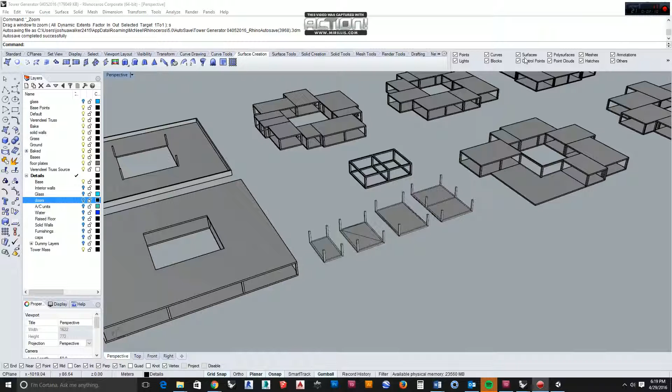The problem is, that's really hard to do with residential construction. Part of that has to do with what we see when we look at residential construction in China. You see the same floor plan extruded up who knows how many times, often upwards of a dozen, and you just get 12 exactly the same towers that provide the same option for all of the market and doesn't really address customization or meeting demand at all, except that what it does is it oversaturates the market, and then you have to charge less in order to fill every unit. So it's not a very efficient system, and it's not a very architecturally desirable system. So I set out to design a better one.

We start with a welded Vierendeel truss, or a rigid box frame, welded in the corners and factory manufactured. This becomes basically the chassis or the frame of an apartment.

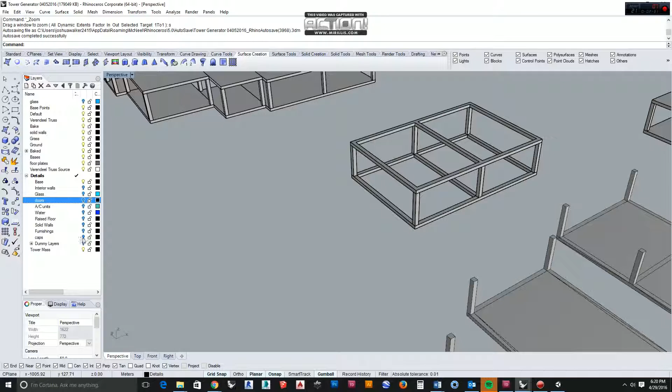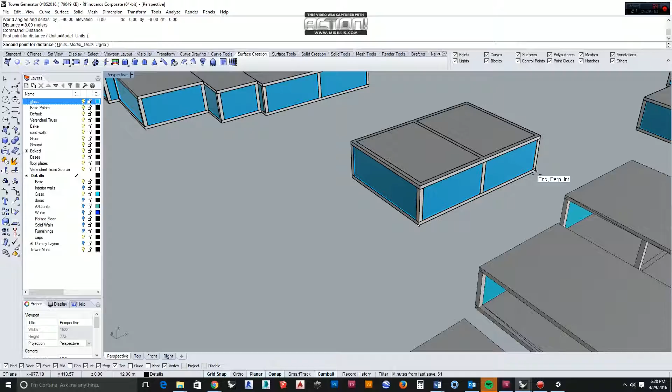The standard approach would be to put a cap and glass around it, and we can see that this would be a 3-bedroom unit, fully enclosed, with dimensions of 8 by 12 meters.

But of course we're going to have options besides that. We're going to have a studio, a 1-bedroom, a 2-bedroom, and a 3-bedroom so that we can meet everybody's demand needs. Rather than surrounding them all in glass, what we'll do is model the tower, and then put solid walls where we need solid, and glass where we need glass. That will look something like this.

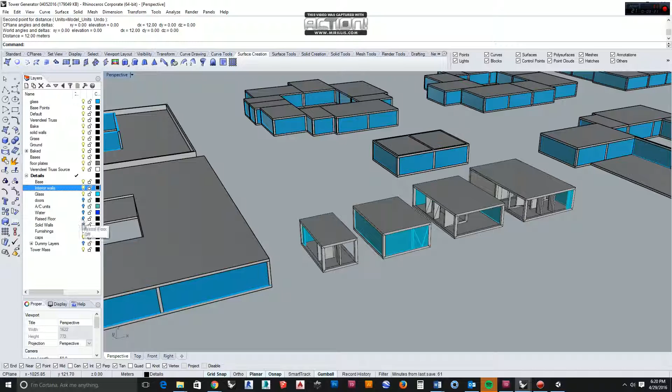So if I take the cap off, we're going to look down into the unit, and we can see interior walls separating the spaces.

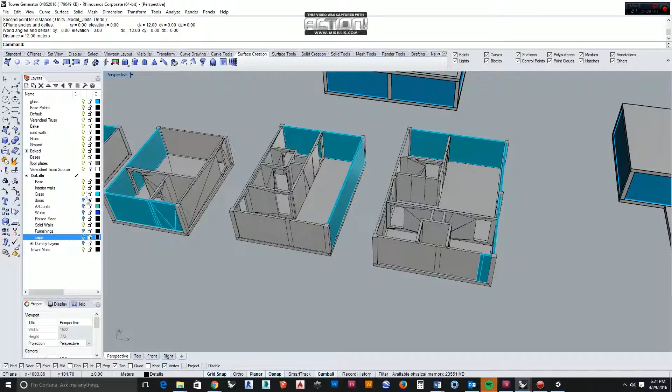Now the question when always dealing with modular units pre-manufactured is, how do you supply air conditioning, water, and electricity? Well, the first step would be to handle AC internally. Because every unit has access to the outside, we can put a split mini system in place and run the services underfloor. Similar approach for the water and electricity, running those underfloor and bringing them to the center core for supply.

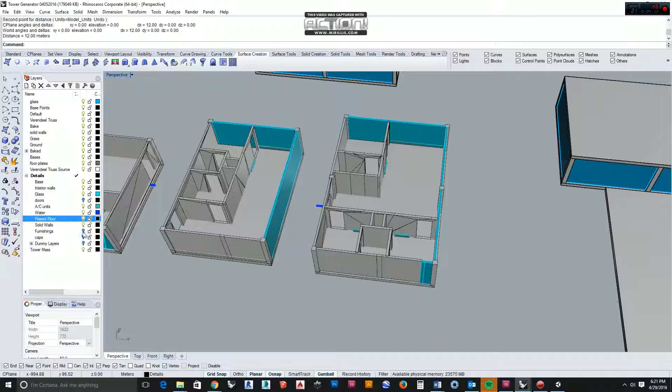So we put the raised floor in place, and you don't have to see the systems, and your units are taken care of. Finally, we'll put some furnishings in, get some pretty comfortable spaces in here. The 3 bedrooms do get 2 bathrooms, and the 2-bedroom gets a Jack and Jill arrangement.

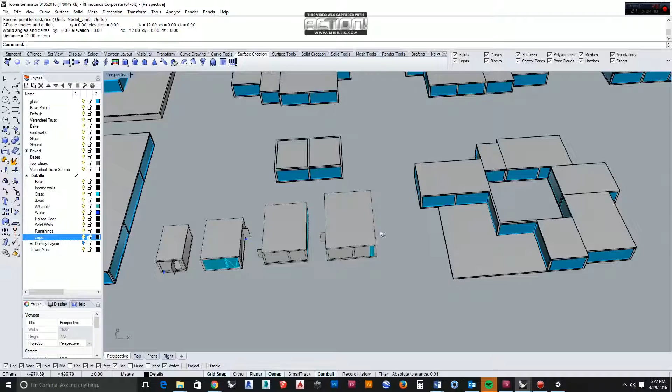Alright, so now that we have our units, what we do is we arrange them into floor plans. In this case we have all the units centered around a 12-meter steel core in various configurations. And then we have 2 non-residential options.

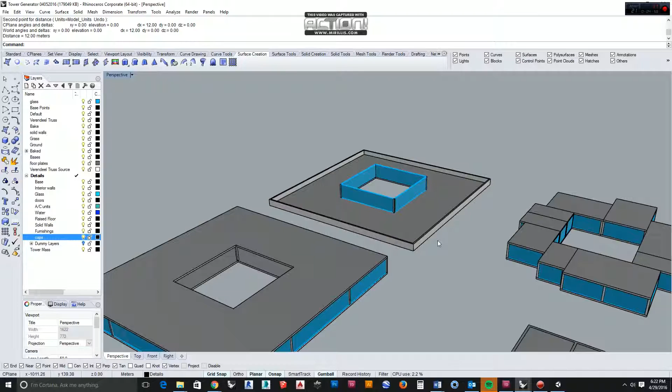We have what I call a smoking or social deck, where just the core is enclosed and the exterior becomes a public patio. Or we have an office or commercial floor where it's all enclosed and you can use this as a small business space or a CVS or something of that nature, maybe a laundromat, to serve the needs of the tower and grant this a true mixed-use status.

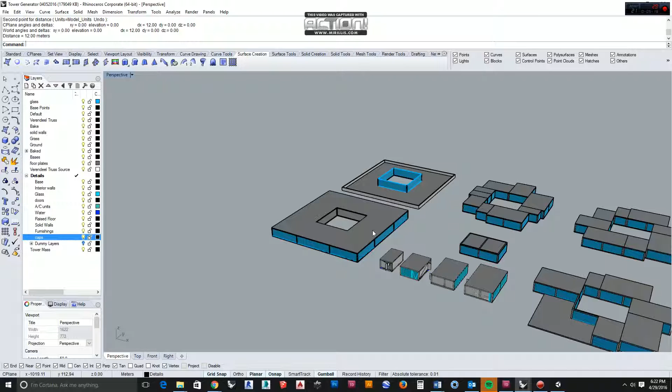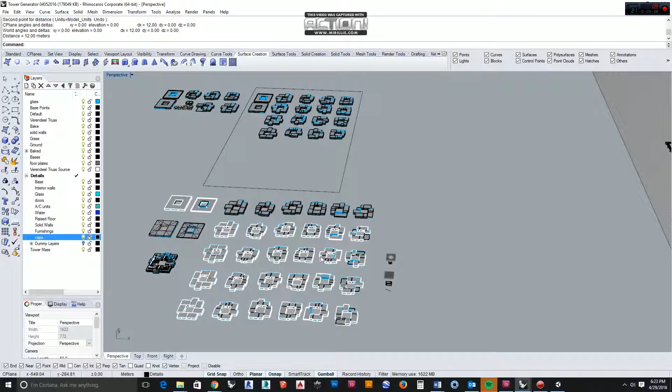So, all in told, we have 24 residential floor plan options and 2 non-residential options, giving us 26 floors that then go into the composition of any tower, matching supply with demand.

Now, in order to demonstrate that, what I needed to be able to do was produce an infinite number of towers with an infinite number of configurations, not something I was interested in modeling by hand. So what I did was I created a Grasshopper script that would create an infinite number of variations for me.

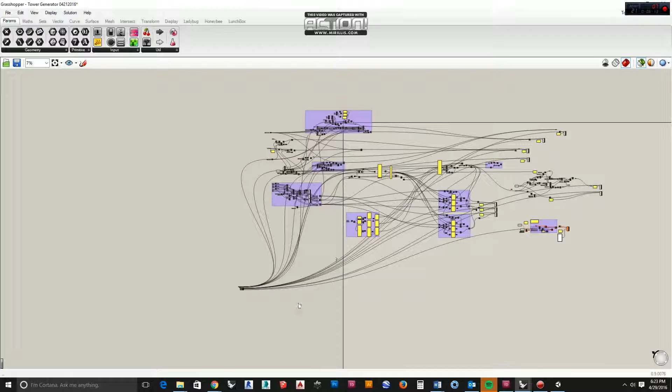Taking those floor plans and arranging them randomly, I fixed floors 1 and 2 as a base and social level, and then the very top floor as a social level. Everything in between has a 1 in 26 chance of being one of the 26 floor plans.

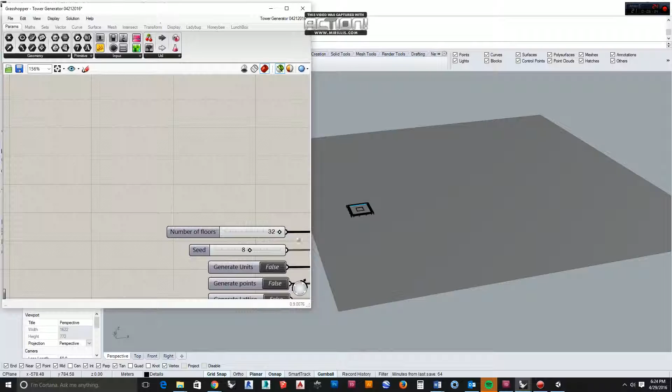So we look at two sliders, one that determines your number of floors, one which determines which iteration of tower you want, and then 3 toggles to actually produce the towers. If I bring this over here, we'll watch this in action with the base file, with this base object being our starting geometry. I'll just go ahead and generate the majority of the tower here.

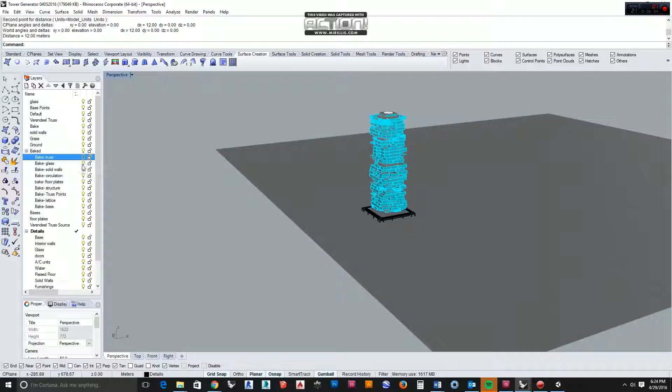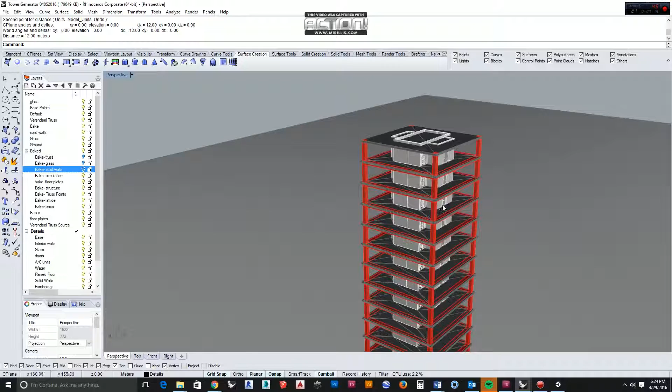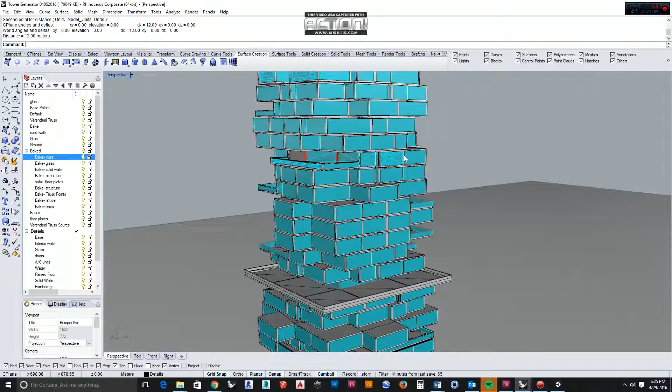I can turn on the baked layers and turn off the trusses and glass. I use truss and unit, because the units are individual welded box trusses. This has generated our circulation core with 2 sets of 2 elevators on either side of a scissor stair in the interior. We have our metal steel frame on the interior, structural steel, with concrete floors for the core. All of the units hang off that steel core. Now you don't see any lateral bracing, and that's what the next 2 toggles are for.

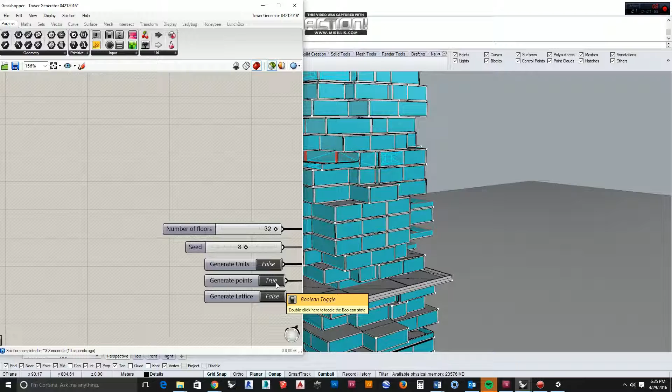So I bring this in here and toggle generate points. This one takes a little bit to work because it contours the floors and creates points according to proximity to the interior generally. There's some geometry finagling I had to do to get this to work, but it works fairly well. The last option is to generate a lattice, which creates lateral bracing between the floors by connecting points by proximity. I'll normally go in and add some points to make it more artistic and more structurally viable, but this works as a fairly decent starting point.

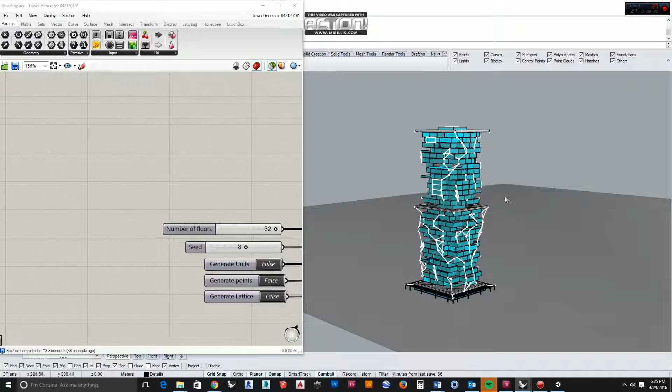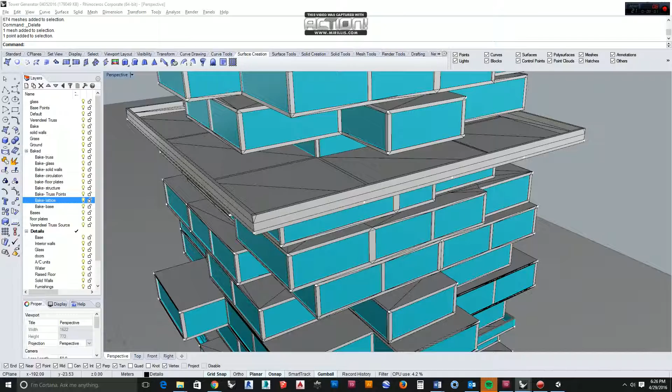Whenever I go in and add points, I'll just delete the stuff that bakes in the generate lattice option. So, bake lattice, select objects, delete. Then I'll come in here, select that point, and offset it. I'll do that, and then toggle generate lattice again, and you can see how that's created a more structurally realistic lattice for resisting moment connection, or moment torque, in the tower. That's how you create your lateral bracing for a tower like this.

Now every iteration of the tower has random floor plans. You can see this one doesn't have any office-level type floors. Each one will create a unique lattice and a little bit different aesthetic.

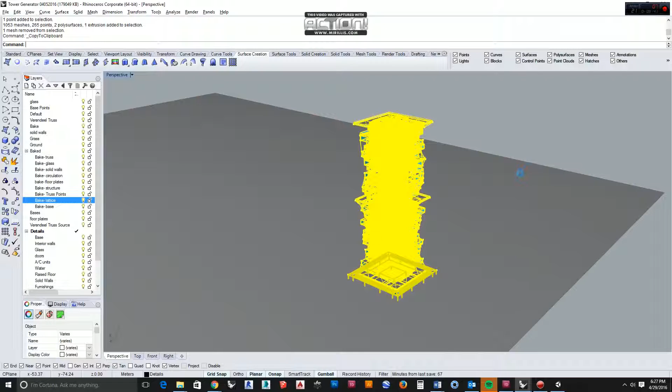So then I'll copy this. It'll take a while, but once it does, you can see how changing the sliders, including the number of floors slider, can give you all different iterations of the tower with variable height and completely random types of units.

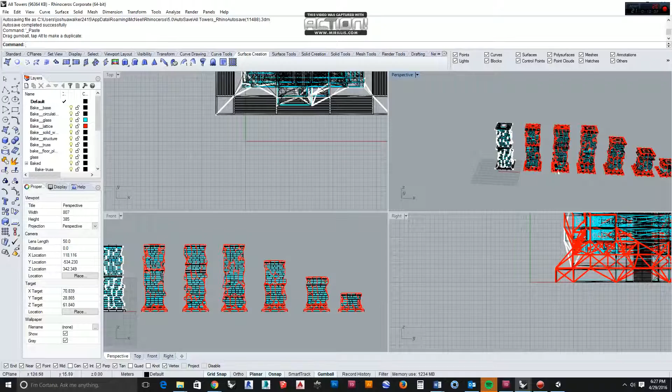With this proof of concept for infinite variability, you have this option for infinite customizability and absolute matching of supply with demand, especially when you talk about a multi-tower site like our site is going to be.

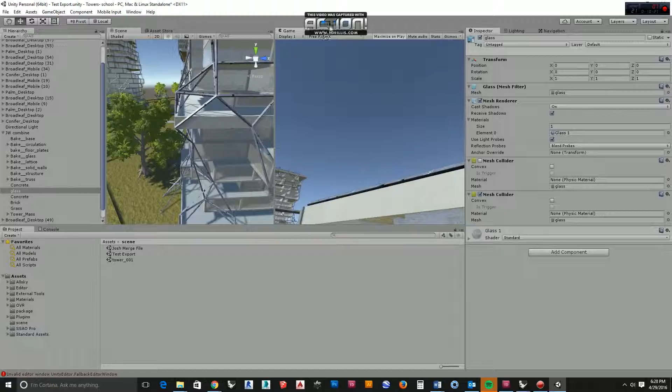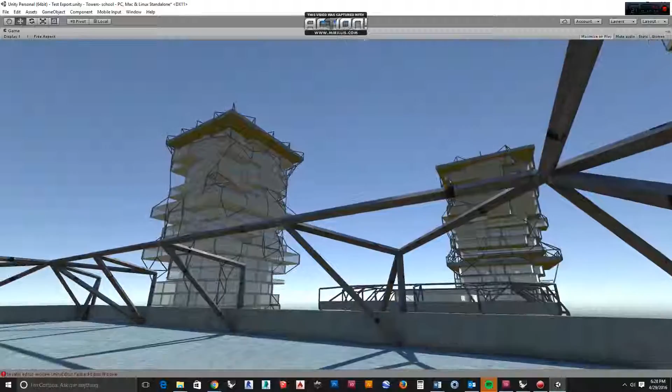That's where we take advantage of the benefits of Unity and the full site modeling and real-time rendering, and we can look at what these towers look like when grouped. I've received surprising compliments from several reviewers who say the towers group well, probably because when you're accustomed to looking at multiple towers on a site, they all look exactly the same, and in fact these very much do not.

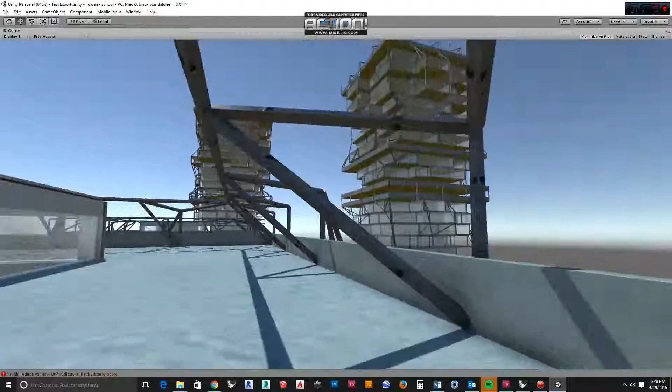I'm going to try to take advantage of the jump feature in Unity and get us all the way over there to the other tower. Or do I really need to? Let's see. So where we are is on top of one tower, and if I go down into the central core, I don't want to go down the stair or the elevator core, but I do want to come down the stairs. This is an opportunity to look into the types of views and the experience you might have in one of these units, this being a 3-bedroom unit.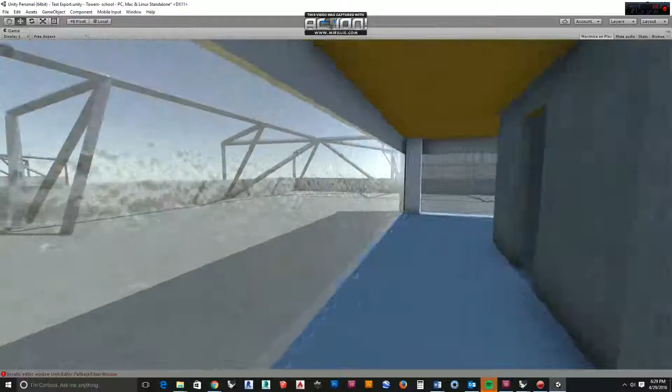So what I want to do is get us over to the other tower. That's the one I want. Sprint and jump. Hey, touchdown, I made it. Okay, so here we're on top of one of the towers, and I'm going to take the opportunity to take us inside for a second and look at what these towers look like.

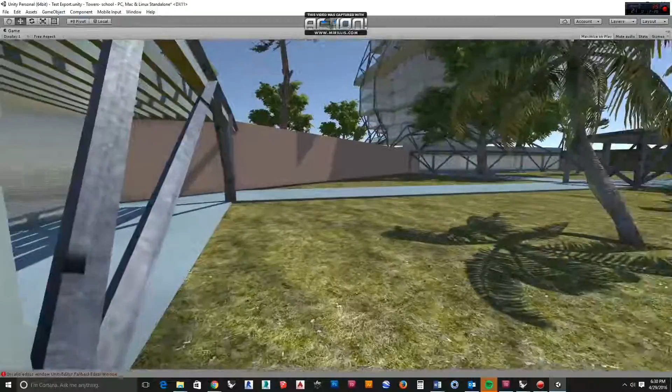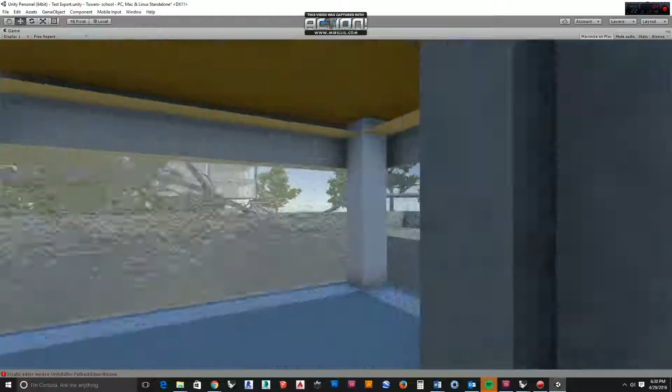Let's see if I can find the right one. There we are, there's what I'm looking for. And I missed it, oh well. But you can see the spontaneous balconies generated, and the options this gives a developer: you could upcharge people for balconies and strategically place them by overlapping units for higher paying customers, or just let it be random and a value-added benefit, letting people fill out the balconies the way they want.

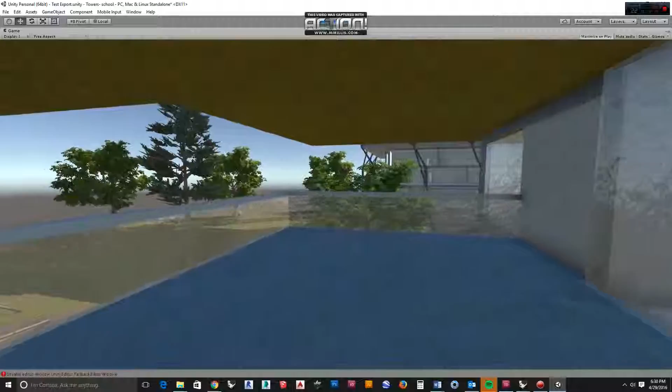Here we're on a social level, a social deck. I think I need to go one more level up. Perhaps one more. Yes, and so occasionally we'll have these smaller patios built into the tower as options for people who might want fewer neighbors and more access to the outdoors. They can have a social level, a social patio.

And so that's my project for mixed-use tower development and site development for our site in Chengdu, China.